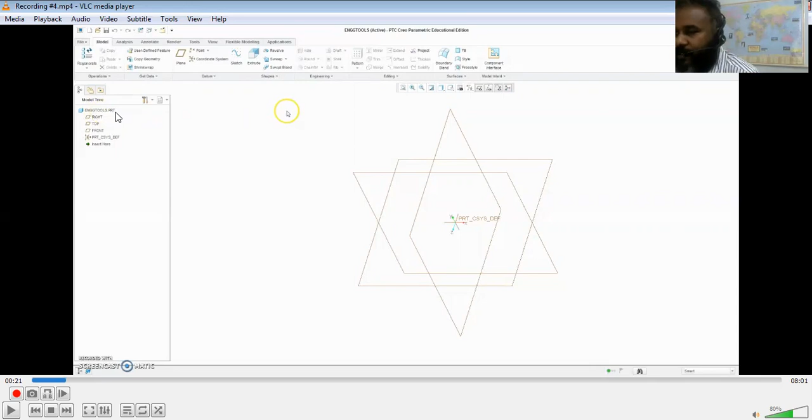We have created a part named engineering tools.part, and you can find it there, next to the extrude and other options that we have used so far. So we have a package of engineering tools which we are going to see one by one.

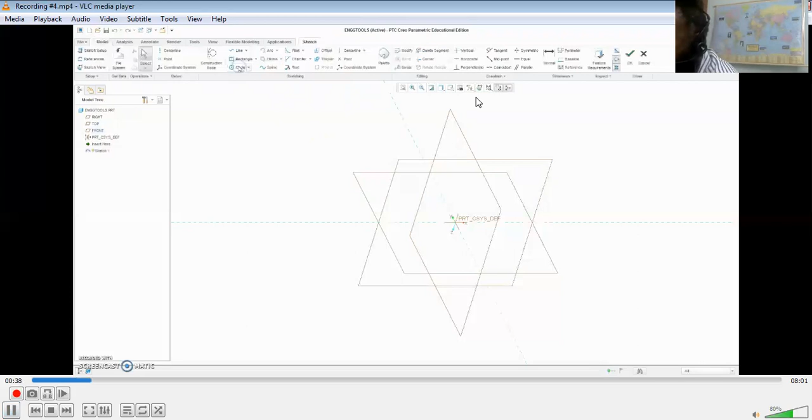To start with, we are going to use all these options. The procedure is we have to create a sketch. Take a plane, choose the sketch option and then the sketch plane for us to draw. Once that is done, I'm going to pick a rectangle and make a closed loop area, then change the dimension.

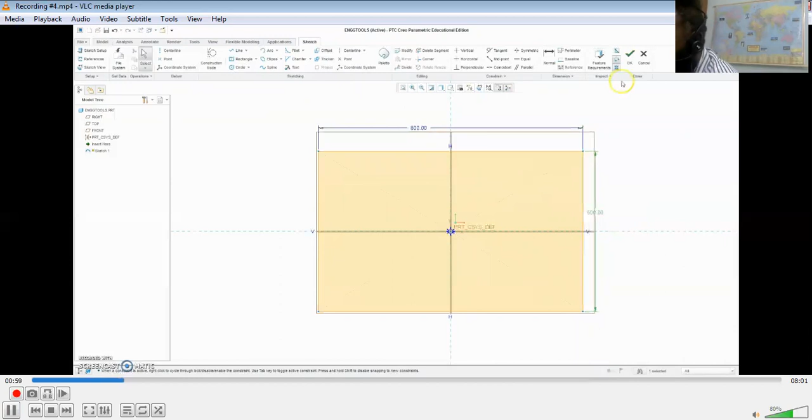Once that is all done, say OK, rotate it and keep it ready. I'm going to extrude in a particular direction, make any dimension change you want to incorporate, and then say OK for the extrude option also.

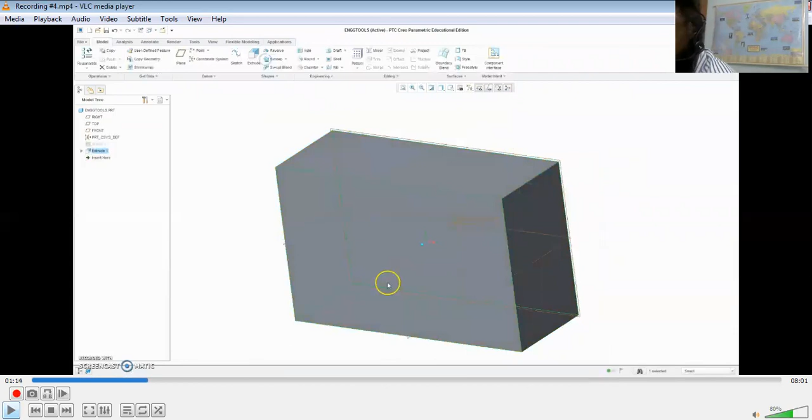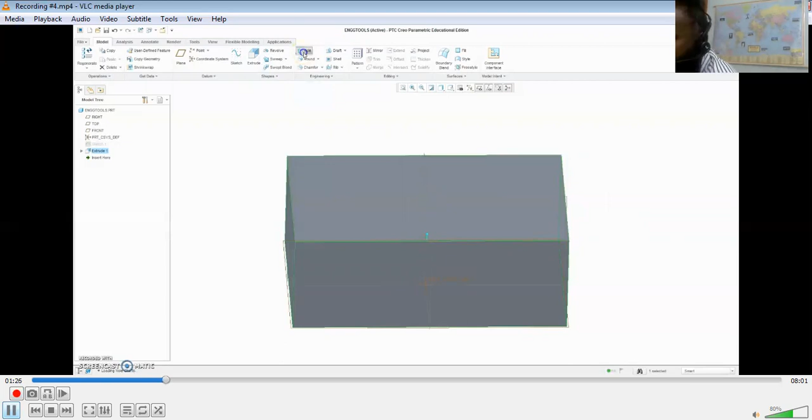Once that is done, I want to create a plane, picking a plane over which I'm going to create a hole. You could choose any plane; I'm choosing the top plane. Once that is done, I click the hole option, and I am supposed to draw a hole. When I click it, it is going to draw on its own.

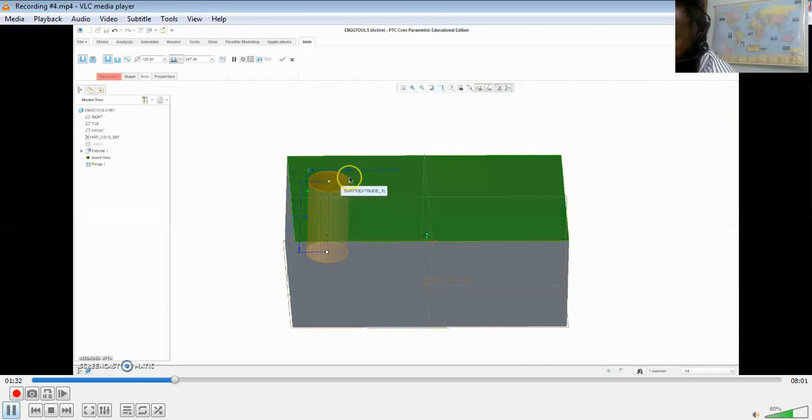What is the dimension, the distance from the corner or from the edge, or from any other feature you want, that you can change. By clicking, as usual, you can make all those changes. I'm just dragging the reference point to the edges and making the dimensional change. I can even change the diameter of the hole itself and even the depth of the hole.

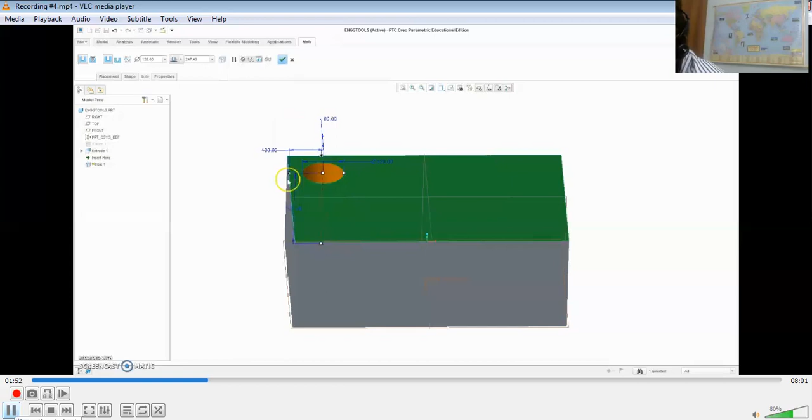So just now I completed the center point distance from the features. Now I'm changing the hole's depth. Once that is done, I can get a through hole. I can as well repeat the same process, keeping the edges as the reference, to do the same thing and repeat the same procedure.

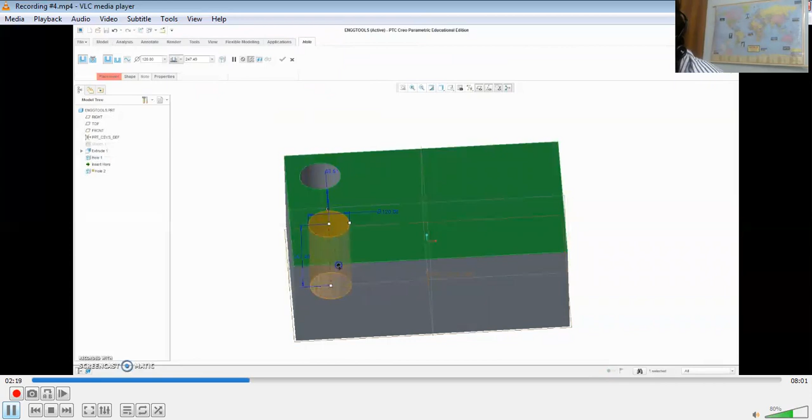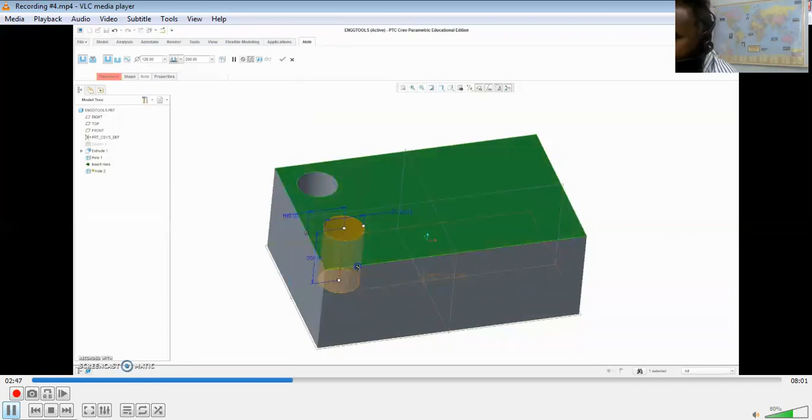Instead of repeating the same procedure, is there any other way to get the same feature repeated over a particular direction or particular feature? That is very much possible. Just now I created the second hole, made a minor adjustment, and validated the dimension. So I'm saying OK, and both the holes are generated.

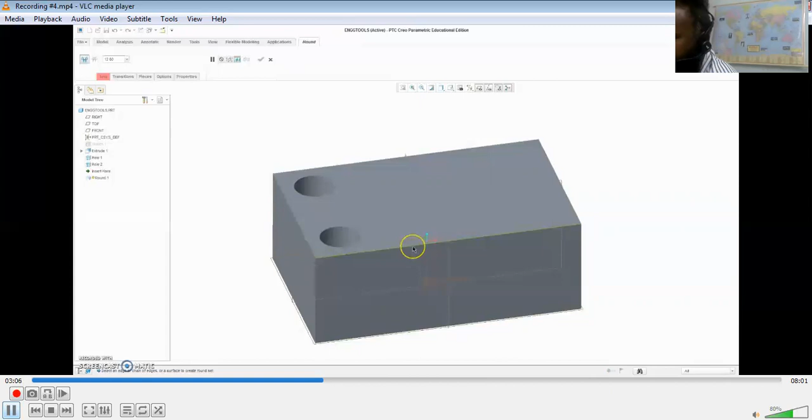What I'm going to do next is the pattern, and the round feature. Round is like, say, the edges can be made smooth. Any given edge can be made smooth. What I do is choose the round option and come and choose the edge. Once I keep choosing the edge, the round feature appears, and the diameter of this particular round feature can be modified.

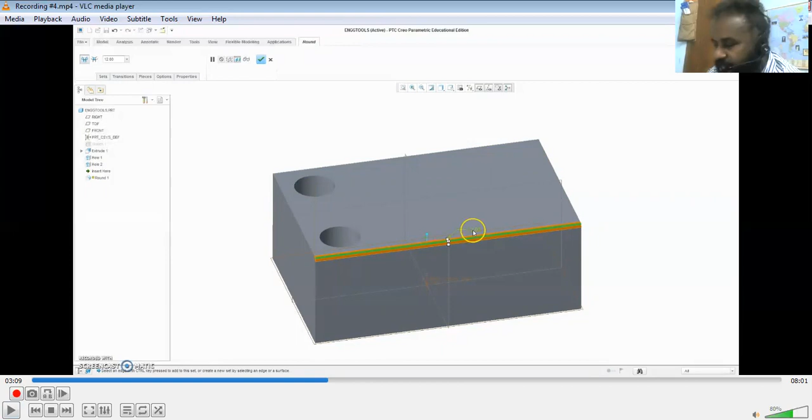Once that is also done, you can choose any number of edges. As long as you have not come out of the round feature, any number of edges you choose, you can keep changing that sharp feature into round.

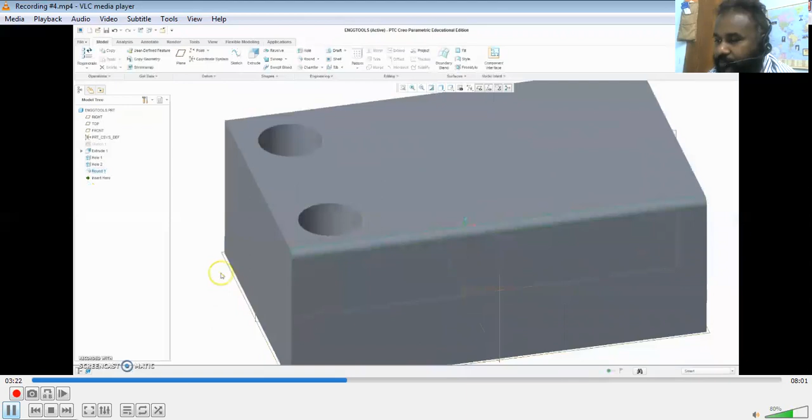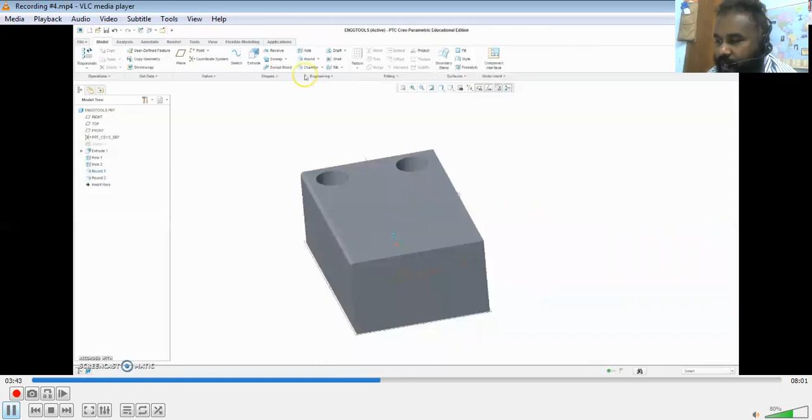I'm just choosing round once again and choosing the edge. Whatever edge is connected to that, all those things I'm going to change. At a click of a button, I can change the dimension. You can always click on it and make the change for the dimensions also. So that brings us to the end of the round engineering feature.

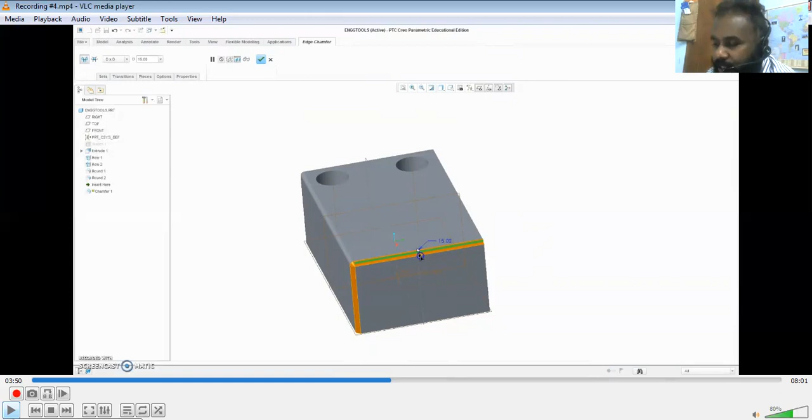And the third one is like chamfer. So chamfer is, instead of having a curvature on the top, a radius, we'll have a flat connecting the two surfaces. Instead of a smooth circular feature, you have a flat feature connecting two surfaces. So that chamfer, this is what we have chosen, is called edge chamfer.

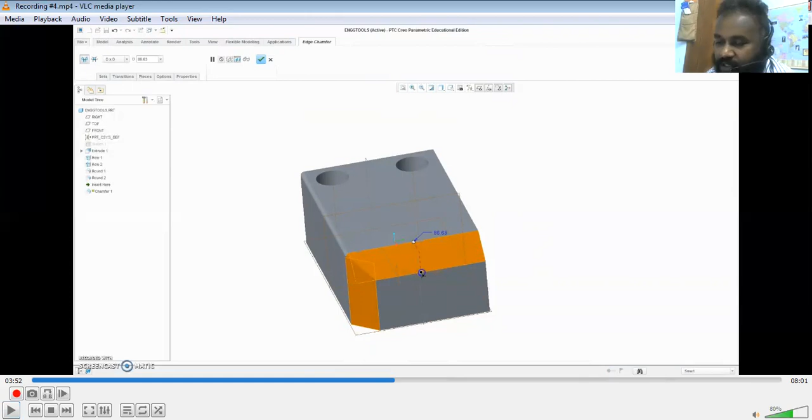So for edge chamfer, you can pick the particular edge, and by dragging it, you can change the dimension of the feature, how far it should affect the surfaces, how deep it should affect the surfaces. So that is again demonstrated here.

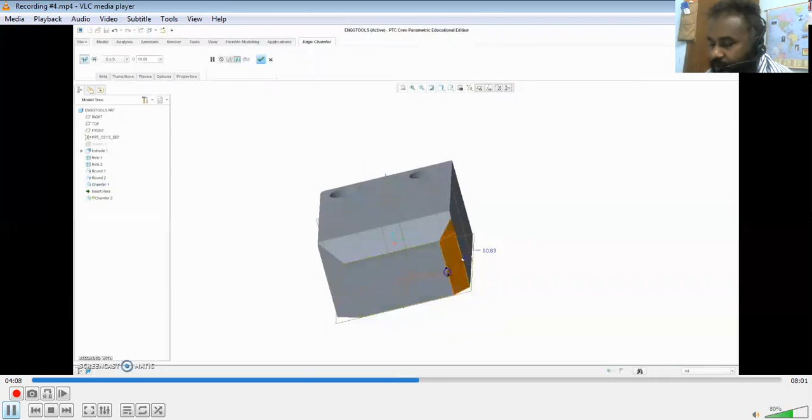Once you are done, you choose the tick mark. You can do it for the other two edges also, so that it appears uniform. So a platform, an edge, a particular dice kind of feature is made by using it in all the directions.

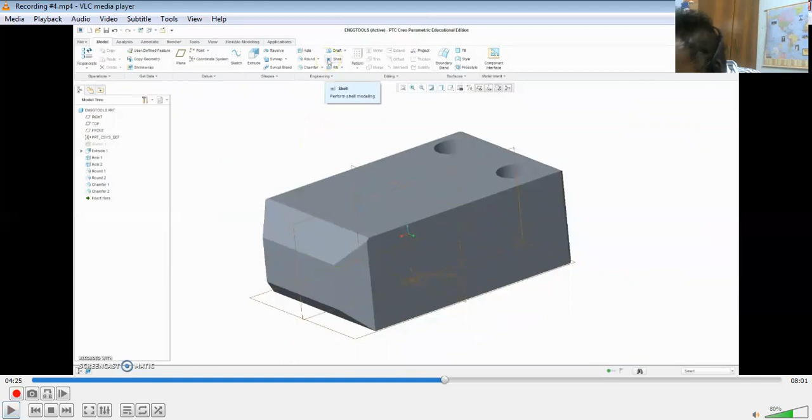So moving on, we are going to demonstrate the feature called shell. Shell, as you can understand, only the outer feature will be retained. Everything inside will be removed. But since the holes were additional features that we created on the extruded object, those things are retained. Everything else has been removed, made into a thin shell.

So how I did it: I just clicked the shell button and clicked on the object that I want to create a shell upon. So whichever surface you click, that way your shell will be created. If you click here, shell will be created in this direction.

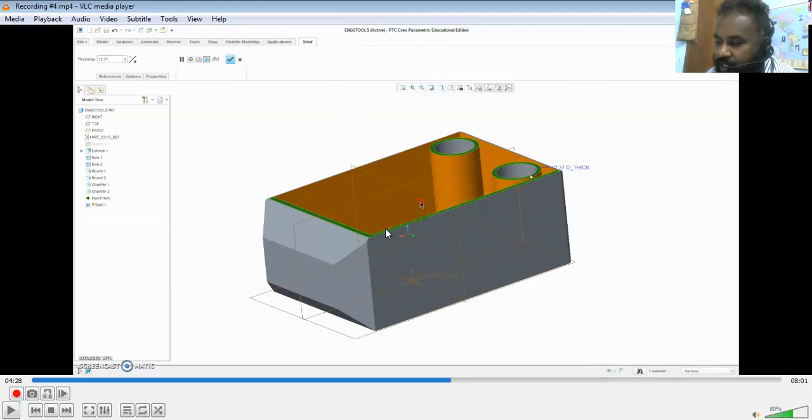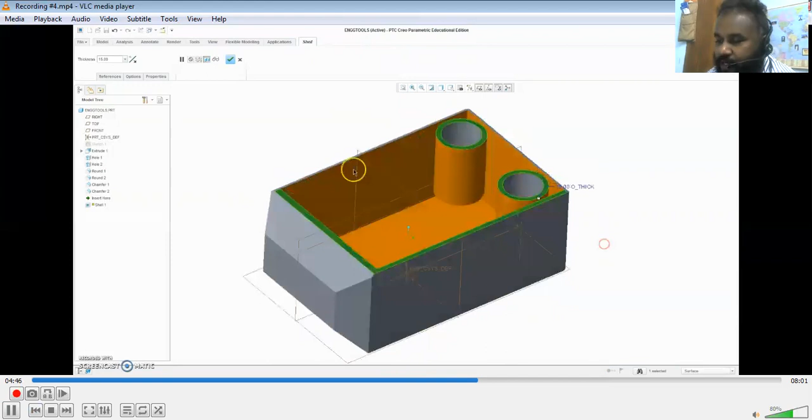So how do I change the thickness of this wall? As usual, I just have to change the dimension, and the thickness is changed. Thickness of the hole's wall and thickness of the shell itself, everything is changed. So that should give you a fair idea of how to utilize this particular engineering tool.

So how do I make a change in this? What I'm going to do is, using this as a plane, I'm going to create an extruded small plane here at the bottom of the wall. And I'm going to demonstrate the next engineering option. So that's why I'm going to do the next sketch.

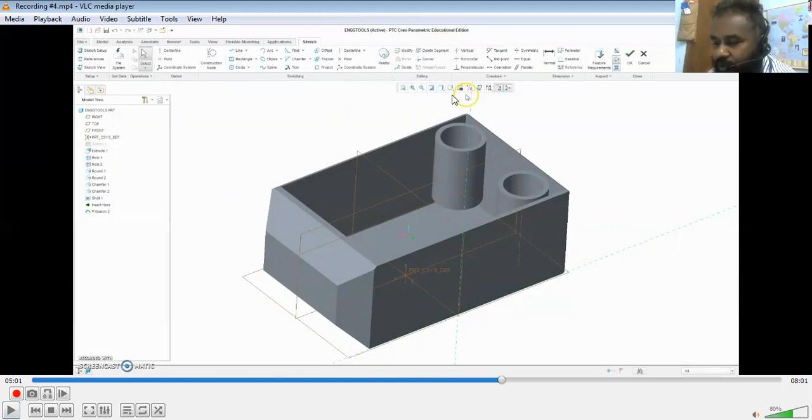So as usual, I click the sketch part, and I'm going to get the plane view where I'm going to draw. Once that is done, I've chosen a rectangle. Choosing a corner rectangle so that I can choose from this corner to any particular corner where I wish to impinge upon. So I chose that option, and I'm drawing that sketch.

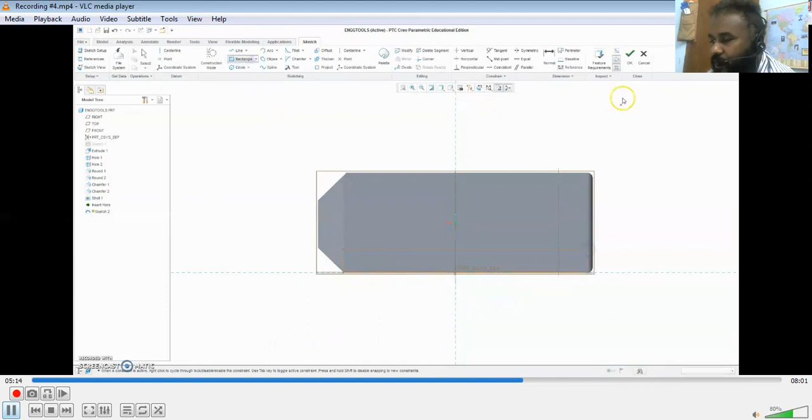Once that is done, I click the tick mark, and I'm going to extrude. So how far I wish to, and other dimensions I want to change now. This is not a standard sketch that I'm replicating, so I'm just randomly choosing a particular dimension.

And the next thing I want to demonstrate is the rib option. So rib is like a supportive structure which will not allow this part, this extruded part, to bend if there is load applied from the bottom.

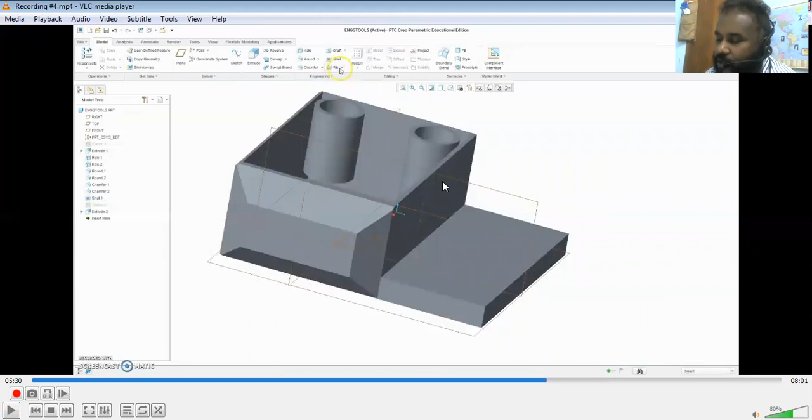So how should I support it? Either I place a complete cuboid on top of it attached to this wall, but that will unnecessarily add weight and volume, so mass and other things increase. Instead, I can have a small feature which will be supporting this surface and this surface. That will be provided by the rib option.

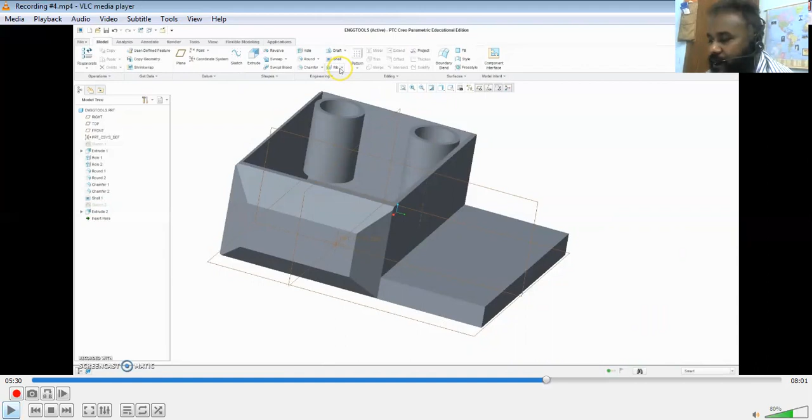So I'm choosing rib. To draw the rib, I need to decide what cross section the rib should have, so I need to create a sketch for that. Here is a plane which is already there, and that plane will be highlighted once you choose the rib option. So whichever plane you want to create the rib on, you can choose that. I'm going to choose this as the plane over which I'm going to draw the sketch. I'm choosing the plane RIGHT.

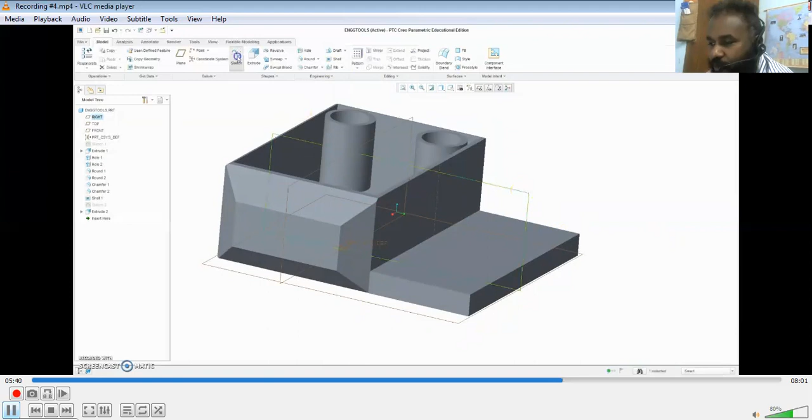So between here and this corner and this corner, these three vertices I'm going to use to draw the rib.

So all I have to do is, if I click a line and try to connect this corner and this corner, it won't allow me. So choosing that particular corner is not possible as it is. So how do I choose this corner? There is a way, a procedure to do that.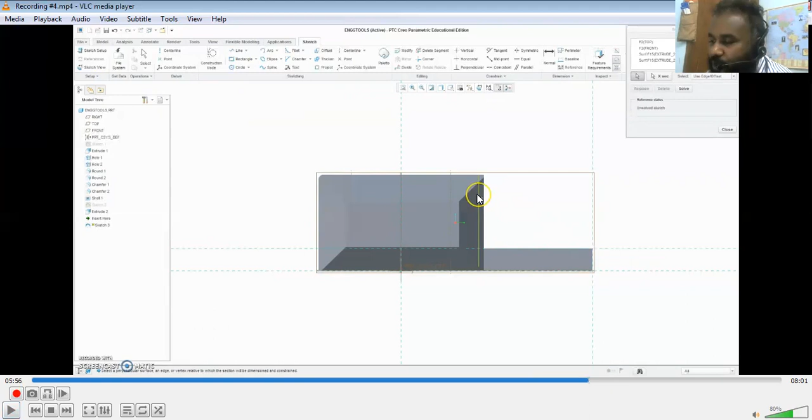If you see here at the left topmost corner, just beneath the first option is reference. Click this reference option and come back to the original image you've created. Click this edge and click this edge. The connecting point will be chosen as one of the reference points. Two edges have been chosen, and similarly for the second point, I'm going to choose this edge and this edge. Once that's done, the connecting point between those two chosen edges will be the second point.

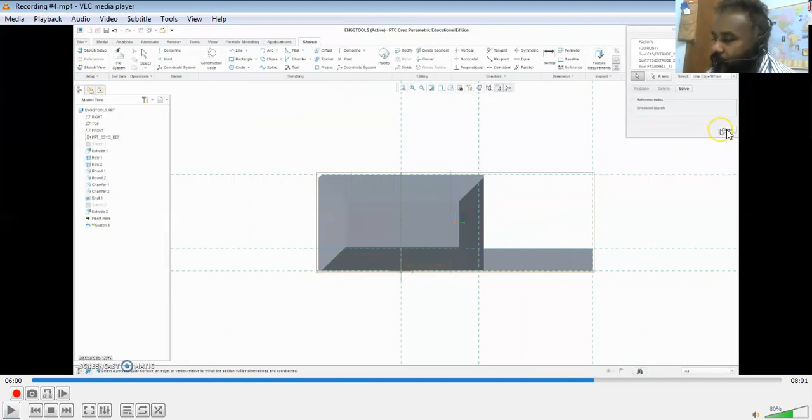A dialog box appeared here. There are other things, constraints and other things that you can change, that will be spoken about later. So now I'm just going to close that. Connecting those 2 points which I've just created using the reference tool, I am going to draw a line. That is good enough for me to create the rib. Drawing a line, so the rib feature will assume it contains these 3 edges and create a rib. That is how we are going to do it.

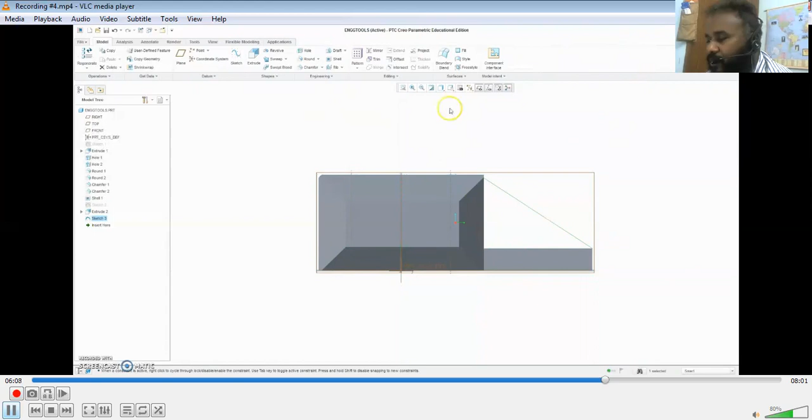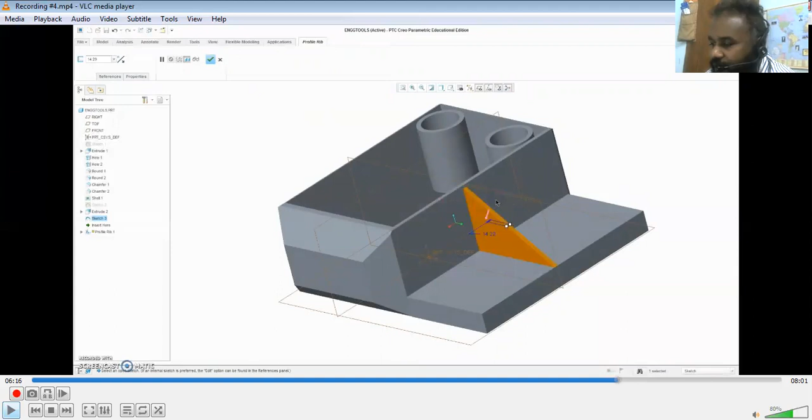I'm again going to click the profile rib option. There's also trajectory rib, which we'll see later. You have the option to change the direction. I've changed it in the opposite direction. By default it will create a rib. Pulling the vertex, say the reference point, is going to change the dimension. Whichever way you wish to extend, you can do it. Or you can type the dimension. And one more way to change it.

Here is the plane. Right now it is at the center, the plane is at the center of the rib. I can create the rib on the other side, left hand side or right hand side, or even in the middle. So how do I do that? Here is the option to do that. Click that, and you get all the 3. Every 3 clicks will give you all the 3 options.

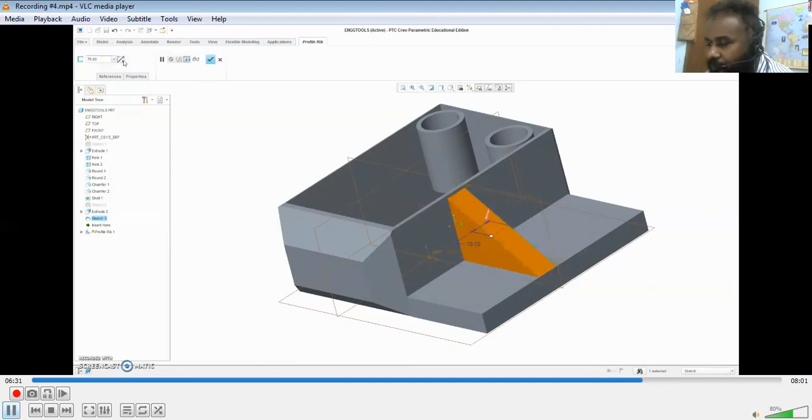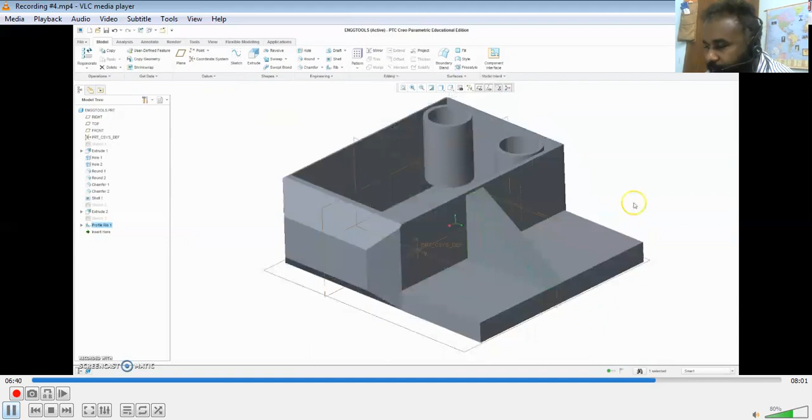You can understand the importance of the rib feature as an engineering tool. It adds value in the form of strength without adding much mass to it. So, yeah, with that we can...

Stop this lecture. Hope you all understood the engineering features we saw now. First one was the hole, and we repeated the hole feature again. Initially, we created an extruded cuboid over which we created 2 holes. So to create a hole, I had to repeat the procedure I did for the first hole. So instead, is there any other way to repeat the hole at the click of a button? Yeah, so that we will be seeing in the next video.

Among the engineering tools, first the hole was done, and then we moved on to the round feature. I click the round feature and click the edge, so that edge will be smoothened. You can also change the diameter of the round feature that has been created. And then followed by that was the chamfer feature. Choose the edge: any two surfaces will have a flat, inclined, oblique surface connecting them. That was demonstrated, followed by creating a rib.

So for a rib, you have two options. We chose one, and we created the rib out of it. With that, we'll end this video.